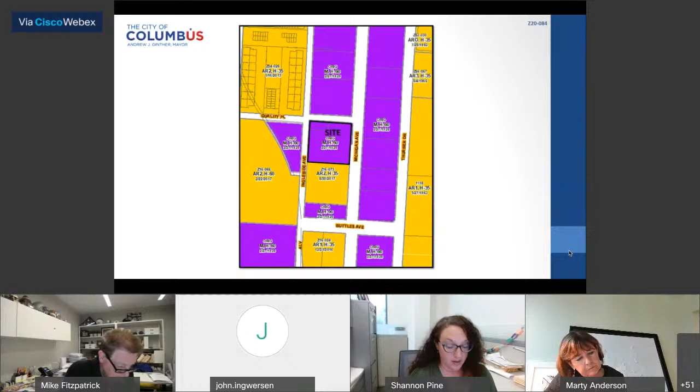To the north across Quality Place is an industrial building in the M Manufacturing District. To the east across Michigan Avenue are a daycare center and office building in the M Manufacturing District. To the south is an apartment complex in the AR2 apartment residential district. To the west across Ingleside Avenue is an industrial building in the M Manufacturing District. Multi-unit residential development in the AR2 apartment residential district is northwest of the site.

The site is located within the boundaries of the Harrison West Plan, which recommends office commercial land uses for this location. The site is also within the boundaries of the Harrison West Society, whose recommendation is for approval.

Concurrent council variance CV 20-097 has been filed to conform the existing telecommunication equipment located in the southwest portion of the site for a monopole on the adjacent property. The request also includes standard variances for increased building height, reduced parking, and reduced parking setback and perimeter yard.

The site plan included with the variance proposes the existing building to be converted to a 27-unit apartment building and the construction of a 28-unit apartment building. The Division of Parking Services has approved a parking study for this proposal and can support the requested parking variance.

The requested AR3 apartment residential district will allow an existing manufacturing facility to be converted into an apartment building and provides for additional apartment development on the site. The proposal is not consistent with the office commercial land use recommendation of the Harrison West Plan. However, given the changing nature of land uses in the immediate area and the age of the plan, apartment residential use is consistent with the mixed-use typology of the area.

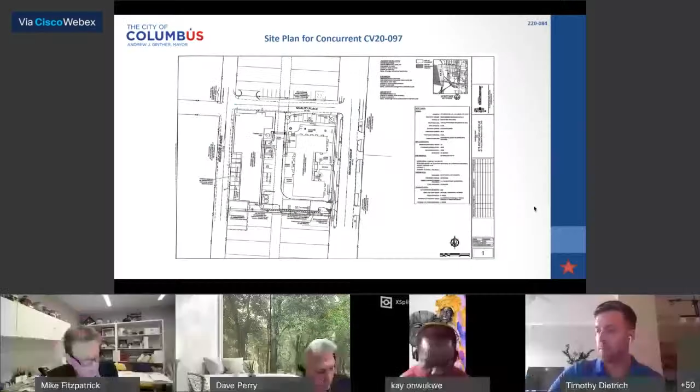Z21-00330 Hawks Avenue. The 0.09 acre site consists of one undeveloped parcel zoned in the CPD Commercial Planned Development District, which permits LP1 private parking district uses. The applicant proposes the R2F residential district to permit residential uses. North of the site across West Broad Street is commercial development in the LC4 Limited Commercial District. South and west of the site across Hawks Avenue are single-unit dwellings in the R2F residential district. East of the site is a parking lot in the LP1 Limited Parking District. The site is located within the boundaries of the West Franklinton Plan, which recommends medium to high-density mixed residential land uses for this location. Additionally, the plan includes early adoption of Columbus citywide planning policies design guidelines. The site is located within the boundaries of the Franklinton Area Commission, whose recommendation is for disapproval. In your supplemental packet, you will see some additional testimony from previous and current property owners of the site, as well as 2 additional letters of support and 2 letters of opposition.

The requested R2F residential district will permit residential land uses. The proposal is consistent with the West Franklinton plan recommendation for medium to high density mixed residential land uses and is consistent with the zoning pattern of the surrounding neighborhood. Planning Division staff supports the request as there are no plans for development of the site at this time. Therefore, City Department's recommendation is for approval, and I'd be happy to help answer any questions.

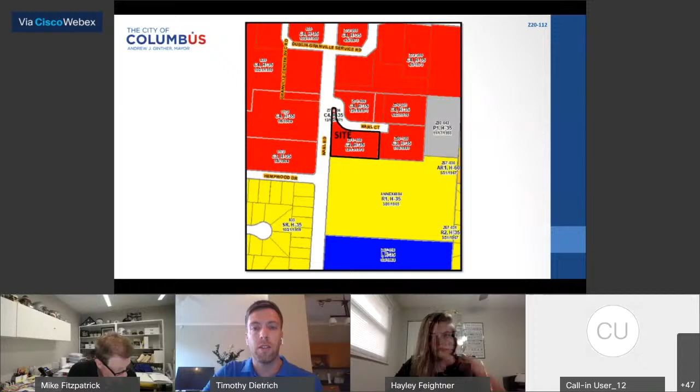North of the site is a religious facility in the C4 commercial district. South of the site is a religious facility in the R1 residential district. East of the site is a commercial building in the C3 commercial district. West of the site is a shopping center in the C4 and C3 commercial districts.

The site is within the planning boundaries of the Northland 1 area plan, which recommends community commercial land uses at this location. The site is within the boundaries of the Northland Community Council, whose recommendation is for approval. The CPD text establishes use restrictions and supplemental development standards addressing building and parking setbacks, traffic access, parking lot landscaping and screening, and dumpster screening. The text includes variances to interior parking lot landscaping, parking lot screening, dumpster screening, screening between commercial and residential districts, and the building setback from Karl Road.

Additionally, the text includes a commitment to maintain the property as shown on the submitted site plan. The requested CPD district will permit C3 uses that allow the existing pharmacy to expand within the existing building on site. The CPD text establishes appropriate use restrictions and development standards that will maintain the property as currently developed. The proposed CPD district is consistent with the Northland 1 area plan's land use recommendation for community commercial land uses at this location and is compatible with the zoning and development pattern along this section of Karl Road. Therefore, staff's recommendation is for approval, and I'd be happy to answer any questions.

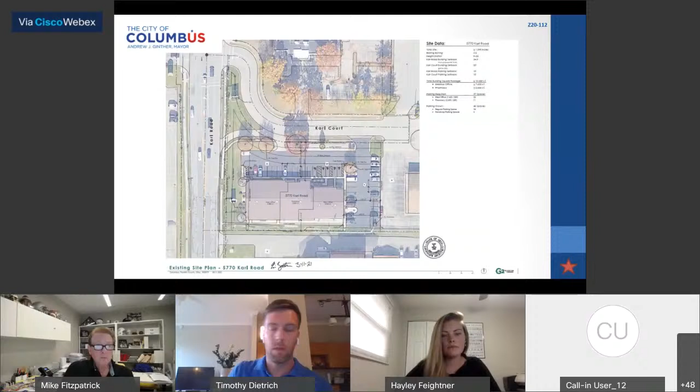Okay, any questions or comments? Dan, any traffic issues here? All traffic issues are resolved.

Okay, David, is there anything you'd like to add to the staff presentation? Nothing I'd like to add. David Hodge, attorney for the applicant, and I'll answer any questions that anybody on the commission or neighbors have.

Okay, are there any questions from the commission? I know Dave Paul is interested in speaking regarding the area commission, so I'll give him a chance to weigh in.

Thank you, Chair Fitzpatrick. Our committee met with Mr. Hodge and the applicants in February of this year, and our committee did recommend approval of this application with two conditions. I don't know if those conditions are satisfied in your packet or not, and perhaps Mr. Hodge will address that. Our committee understood the underlying need for the rezoning, and we supported that.

However, the applicant was requesting to vary from the C3 district they're requesting, in that they wish to not screen a dumpster and wish to avoid screening along the southern property line. Our committee did not support those two variances, so we asked the applicant to remove them. With those conditions satisfied, we are recommending approval.

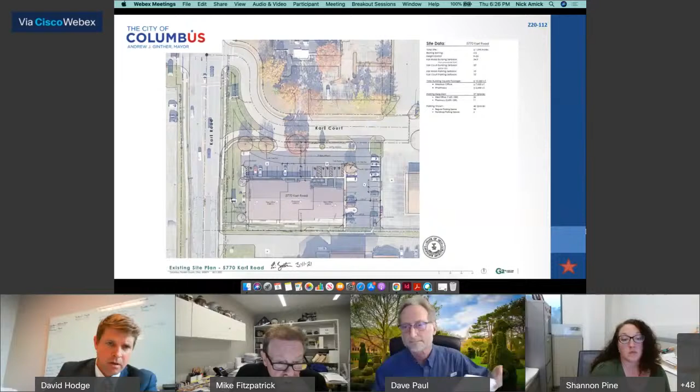Sure. I wonder if we could go back, and I don't know who's driving this, go back and show the site plan so we could refer to that as I address Mr. Paul's remarks. So essentially, what Northland concluded as conditions for their recommendation of approval were two things.

They would like to see the dumpster, which is located here. If you're able to see, in the lower right-hand corner of the property, if you guys can see that.

There's a code requirement that says the southern perimeter of the property needs to be buffered because the church to the south is zoned residentially. But as you can see from the site plan, that's a drive aisle along the southern portion of the property for a church complex that resides there. These are all existing conditions, and from our perspective, the policy purpose behind the screening requirement is to buffer commercial from residential uses, not drive aisles and church uses. So we unfortunately disagree with Northland that the southern perimeter needs to be buffered because it's not residentially used.

The dumpster likewise does not need to be screened. I think it's noteworthy that in your package are two letters of support, one of which I believe is from the church pastor and the property owner here to the south.

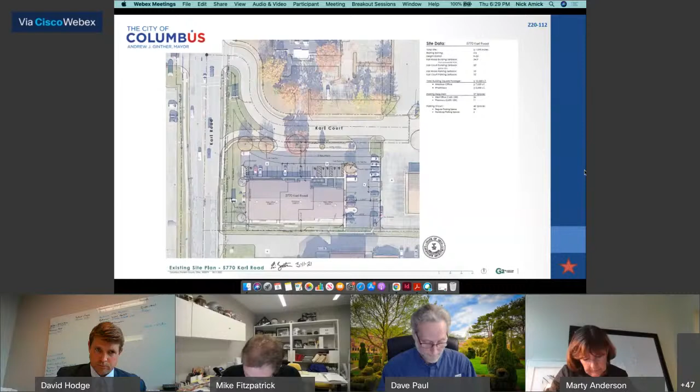Amanda Golden, yes. John Ingwersen, yes. Kay Onwukwe, yes. Marty Anderson, yes. Maria Conroy, yes. And Chair Fitzpatrick, yes. You are approved. Thank you all very much.

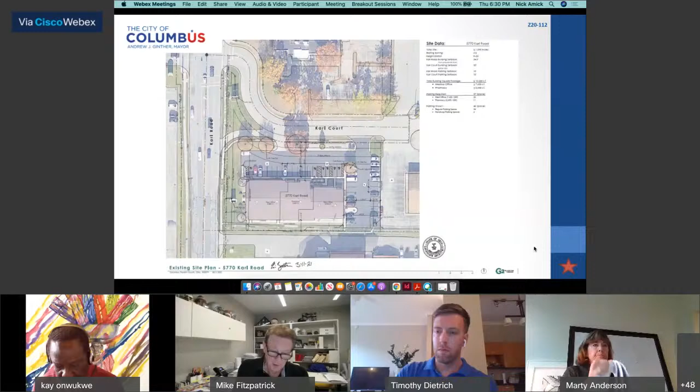Case number 4 was tabled earlier this evening, so we will go to case number 5, which is Z20-017, 5364 Thompson Road. Within your supplemental packet, you will find several letters of opposition from owners within the adjacent subdivision. The site consists of one parcel recently annexed from Blendon Township, developed with a single unit dwelling in the R Rural District. The applicant is requesting the AR1 Apartment Residential District to permit a multi-unit residential development.

To the north and east of the site is a multi-unit residential development in the PUD8 Planned Unit Development District. To the west are single unit dwellings in the PUD8 Planned Unit Development District. To the south, across Thompson Road, is undeveloped land in the PUD8 Planned Unit Development District.

Concurrent CV 21-021, which commits to a site plan and has a maximum number of 88 dwelling units, has been filed to vary the perimeter yard. That request will be heard by City Council and will not be considered at this Development Commission meeting. And I think there's a typo in this—I believe it's CV 20-021.

The site is within the planning area of the Northland Plan Volume 2, which recommends preserve district for this location, calling for a mix of single unit and multi-unit residential uses with some commercial uses. No specific land use guidelines apply to this site. The site is located within the boundaries of the Northland Community Council, whose recommendation is for disapproval. The requested AR1 apartment residential...

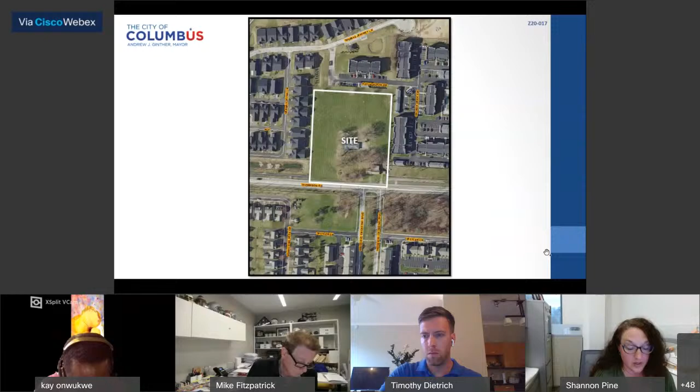Sorry, I'm getting some feedback. I'll try again. The requested AR1 apartment residential district will allow a residential development that is compatible with the density and development standards of adjacent residential developments. The proposal is also consistent with the land use recommendations of the Northland Plan Volume 2. Planning Division staff is supportive of the proposed site plan included with the concurrent council variance, which includes a central green space and provides pedestrian connectivity throughout the development. Therefore, staff's recommendation is for approval, and I would be happy to answer any questions. Thank you.

Any questions or comments from the commission? Okay, Dan, any traffic issues on this site? All traffic issues are resolved. And Kathy, Recreation and Parks?

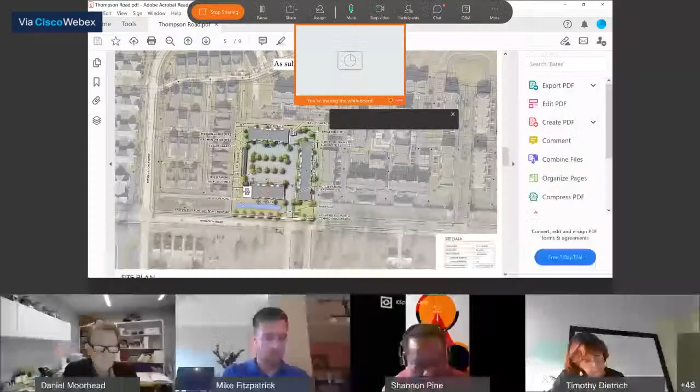I don't hear Kathy, and I can't see her shake her head, so we'll follow up on that. Okay.

There are some speakers, I can just chime in. For parks, there would be a parkland dedication ordinance requirement, and most likely they would be requesting a fee in lieu, and there may be some standard comments during final site compliance review that addresses street trees and whatnot.

All right, on this case we will be hearing from Dave Paul, and there are 3 speakers who are against this proposal. So let's have David. David Hodge, do you want to speak? Yes, please. Okay, please add any comments you have.

Okay great, Shannon, I wonder if someone there can allow me to share my screen. I think you are. Oh, I am already? I see a rendering, I think so. Okay beautiful, okay I didn't know. I tried it and it worked, but I didn't know if it was just me seeing it or if it was everybody.

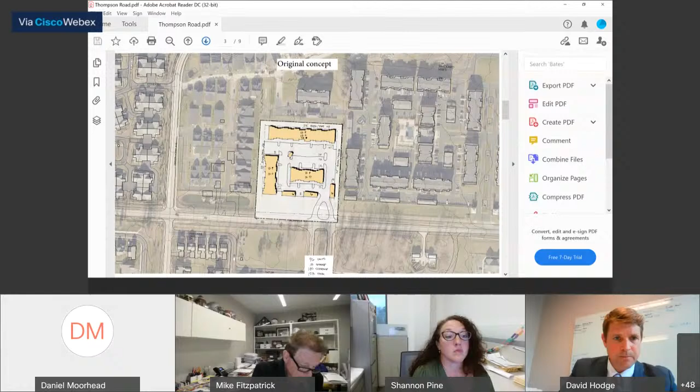Taking the pool and putting it down here along the south with this amenity building, making that be the perimeter as opposed to a building edge, like we had initially. So we've worked to try to soften that edge as best we can.

Certainly, neighbor participation at the Northland Community Council, a couple of meetings we had with them, and I won't put words in their mouth, they can certainly speak for themselves, but we stand by the notion that the density proposed here at just under 23 units an acre, the existing multifamily nature of Thompson Road and the perimeters of this property, our willingness to work with neighbors and with planning to modify the plan, our willingness to commit to that

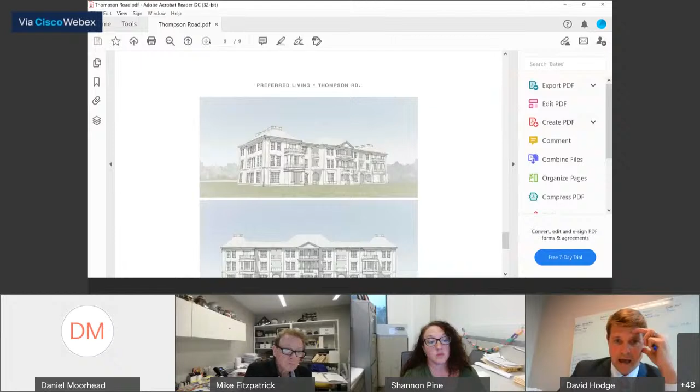plan and to this, what I believe to be really excellent architecture, all tips the scale in balance of a recommendation of approval from the Development Commission on to City Council. I'll stop there.

My client, Jared Smith, is here with me. Jared, I don't know if there are things that you'd like to add before we kick it back to the commission and hear from neighbors. I don't have any other.

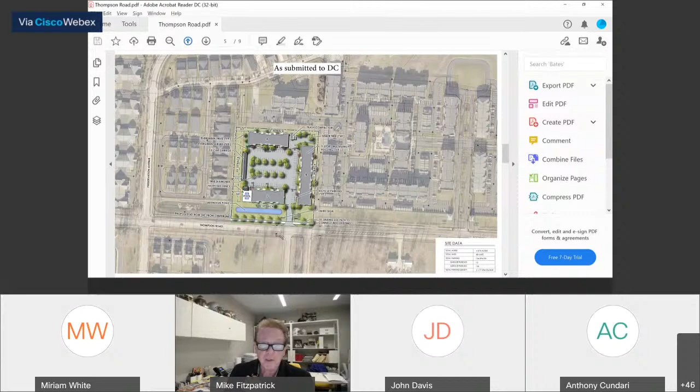Let's bring this back with David. I'd like to keep that aerial photo on the display that's on right now. David, you've heard the issues presented with density and an existing green space that nobody wants to give up. Yes, sir.

So if I might take a minute to address some of the issues I heard from neighbors. You can see the site plan here on your screen. There was general discussion from multiple folks about the development here being too close to the rear of their homes over here at Mayfair.

We attempted to address the issue by redoing the site plan through several different iterations, resulting not in the side of a building being located along that perimeter, but rather the end here, the lower garage structure, and down here, the pool, with significant setbacks all along. Again, the minimum code requirement is 25 feet, and the closest we are is 37 feet with the low, one-story garage structure.

So there was another comment about no green space on the perimeter. It might not be a single-family house on practically 4 acres anymore, certainly, but we are providing green space along the perimeter. And if the Mayfair Bungalows neighbors prefer that we maintain this existing perimeter and put up a vinyl fence, a basket-weave fence, or a board-on-board fence, those are all things Preferred Living is willing to do and commit to here on this plan as an additional buffer.

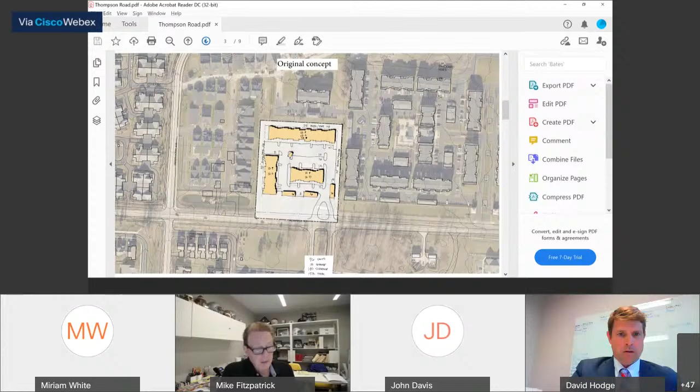Let's go through the commission first. First of all, I'd like to ask, is there any comment or input from the commission members as they look?

Keep that photograph up, right? The actual photograph of existing conditions with the empty lot. There you go. Palmer House, that's 3-story buildings? Yes, sir. The adjacent multifamily is consistent with the height being proposed here.

That's one of the things when you're talking about is a development too dense, then you're talking about parking reductions and height variances and various things. None of those things here. So that adjacent residential is like this, like the proposal before you, 3 stories.

My comments, I'll just keep it simple and straightforward, is the density doesn't bother me. You've moved the buildings back from the west property line. I think in addition to that, you mentioned you would be willing to build a fence. I think that is appropriate, but I also think that the homeowners that are lined up against you on that west property line deserve some evergreens and some deciduous trees for some privacy for their backyards, as well as the 37 and 57 foot or 47 foot space buffer.

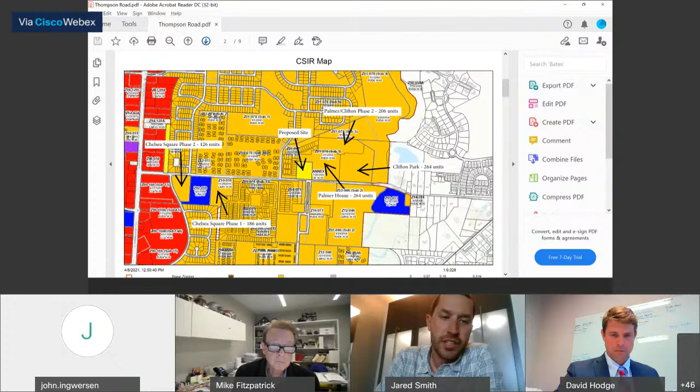Consistent with Palmer, Clifton, and the Mayfair bungalows, it's going to be a mix of brick and mostly vinyl siding. If you look at it, the end of the building is mostly glass on the front. You have kind of towers of brick with some vinyl in the middle. The nice thing about these buildings is the way that they break. Most of them are less than 16 feet, which means in most cases, we're finishing design right now with no vinyl seams, even in themselves. And as vinyl continues to improve, it's harder and harder to tell what's vinyl and what's Hardie.

So Jared, if I might ask you a question—well, actually, never mind. Sorry to interrupt. We'll go on with commission. Does any other commission member besides John have any input or questions?

Yeah, Mr. Chairman, this is Kay. I think when you look at the site plan and then look at the rendering, it looks like what is being proposed is actually in context with the surrounding buildings. I can understand the concern the neighbors are having based on what they've experienced. But the idea the chairman suggested, introducing some evergreen trees, will help create that visual vista for them and provide a physical break from the 3-story building they'll be looking at. So I think the site plan is very attentive to the neighbors.

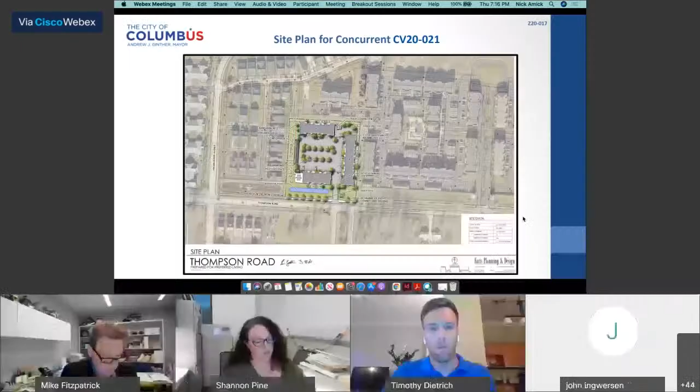Okay, it's 7:15. We can go through one more case at least, and then we'll decide if we're going to take a break or keep pressing on. So let's go to case number 6, Z21-004, 790 North Nelson Road.

The site consists of one parcel developed with a former branch of the Columbus Metropolitan Library in the R4 residential and C4 commercial districts. The requested CPD commercial planned development district will permit the site to be redeveloped as the City of Columbus Police and Fire Joint Wellness Center, to provide mental health and wellness counseling services for the city's first responders.

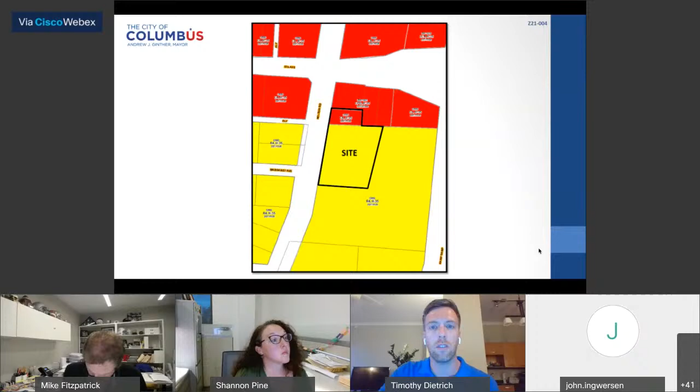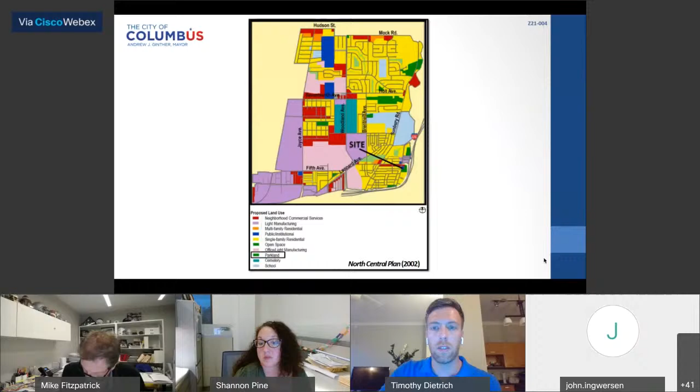North of the site is a gas station in the CPD Commercial Planned Development District. South and east of the site is Shepard Park in the R4 Residential District, and west of the site are single unit dwellings in the R4 Residential District. The site is within the planning boundaries of the North Central Plan, which recommends parkland use at this location. The site is located within the boundaries of the North Central Area Commission, whose recommendation is for approval.

The CPD text establishes use restrictions and supplemental development standards that address building and parking setbacks, traffic access, pedestrian connectivity, parking requirements, parking lot landscaping and screening, and street trees. The text includes variances to parking lot screening, parking lot shade trees, screening between commercial and residential districts, sidewalk connection, and the maximum number of parking spaces permitted. Additionally, the text includes a commitment to develop the site as shown on the submitted site plan.

The requested CPD Commercial Planned Development District will permit C2 uses that include a medical office with counseling services to accommodate the City of Columbus Police and Fire Joint Wellness Center. The CPD text establishes appropriate use restrictions and development standards and includes a commitment to develop the site in accordance with the submitted site plan. While the proposed CPD district is not consistent with the North Central Plan's recommendation for parkland uses at this site, the request will permit the redevelopment of a former branch of the Columbus Metropolitan Library and will not add incompatible land uses to the area. Additionally, the proposed variances are supportable because of the specific type of services provided at this location, resulting in increased security needs. Therefore, City Department's recommendation is for approval, and I'd be happy to answer any questions.

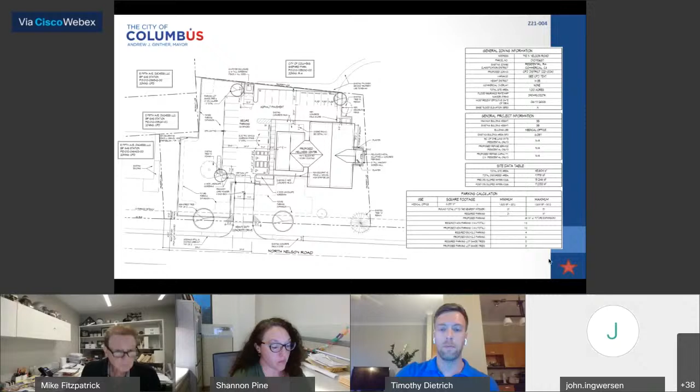Any questions? Dan, traffic issues? All traffic issues are resolved. And recreation and parks, Kathy? No recreation and parks issues.

Does any commission member have any comment or questions for the staff? Okay, the applicant is Mike Jones. Are you here to speak? Yes, sir, I'm here. Is there anything, Mike, you'd like to add to the staff presentation?

Yeah, I think Tim covered everything regarding the project here. But basically, this is a project - it will be a mental health facility, sorry, bear with me, I have a speech impediment so I'll try to speak as clear as I can. This project is one of the mayor's goals this year to improve public safety. Right now, officers' and firefighters' jobs are taxing, and it's very taboo right now for them to speak on their mental health. So our goal here is to create a building, a place dedicated just for them to get counseling, where they feel safe, where it's judgment free and private, and they feel welcome to get help. So that's really it for me.

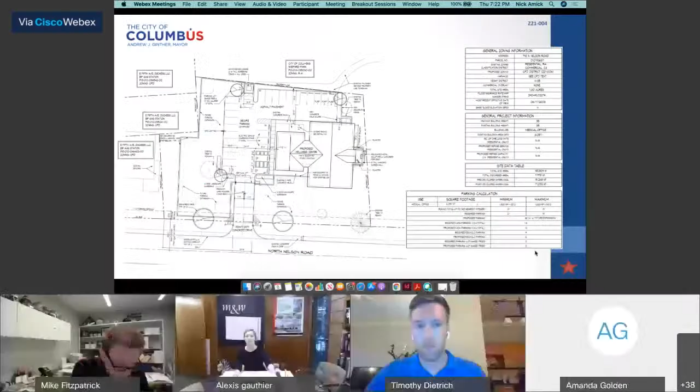Okay, we'll do one more case and then we'll take a poll on whether we take a break or not. Case number 7, Z21-006, 4398 Trabue Road.

The 10.11 acre site consists of one parcel developed with a single unit dwelling in the R1 residential district. The requested LC2 limited commercial district will permit office commercial development. The site is surrounded by industrial development to the north, east, and west in the M2 manufacturing district. To the south across Trabue Road are a single unit subdivision in the R2 residential district and undeveloped land slated for an apartment complex in the L-ARLD limited apartment residential district.

The site is located within the planning area of the Trabue/Roberts area plan, which recommends employment center uses at this location. The site is located within the boundaries of the West Scioto Area Commission, whose recommendation is for approval. I did get an email recommendation shortly after I had already emailed the supplemental packet information, so it was not included in the supplemental packet, but the recommendation is for approval 7-0.

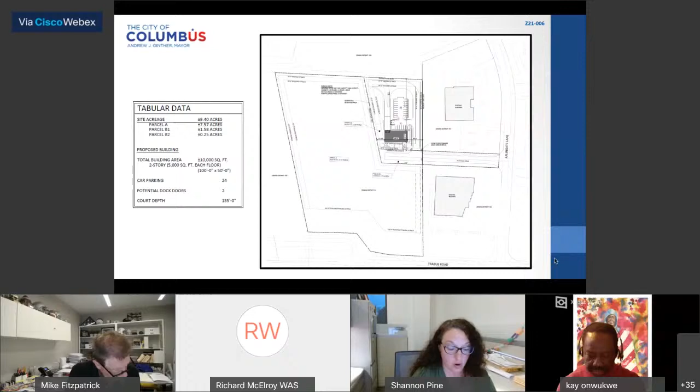The limitation text establishes use restrictions and supplemental development standards that address building and parking setbacks, traffic access, increased landscaping and screening, and lighting controls. The text also includes a commitment to development of the site in accordance with the submitted site plan and building elevations for parcel B1.

The requested LC2 limited commercial district will permit redevelopment of the site with office and related uses. The limitation text includes increased development standards in consideration of the residential uses to the south, and access is restricted via a private driveway from Arlingate Lane. The request is consistent with the employment center land use recommendation of the Trabue/Roberts area plan and is compatible with the surrounding industrial and residential development. Therefore, staff's recommendation is for approval, and I would be happy to answer any questions.

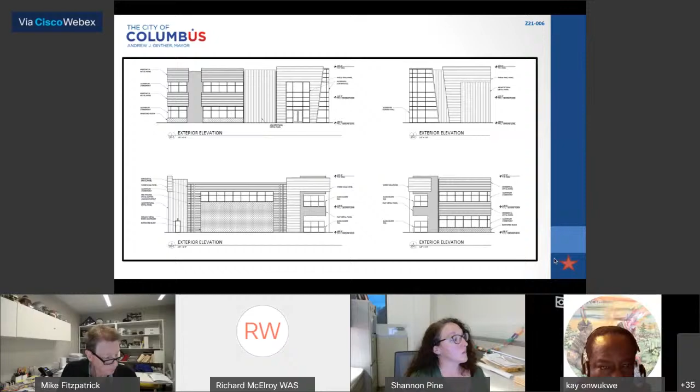Thank you. Okay, Dan, any traffic issues here? All traffic issues are resolved. Okay, and Kathy, Recreation and Parks? There are no recreation parks issues.

Wonderful. Okay, are there any questions from any of the commission members? Okay, Jill Tangeman, do you want to add anything to the staff presentation? I see you have achieved approval from both the area commission and the staff, so. No, I don't have anything further to add. If you have any questions, I'll be happy to answer them. Okay, any questions or comments for Jill?

And there were no speakers signed up for this, so I'm assuming there are no outside speakers. Thus, we are ready to call the roll. Marty Anderson, Yes. Maria Conroy, Yes. Amanda Golden, Yes. John Ingwersen, Yes. Kay Onwukwe, Yes. And Chair Fitzpatrick, Yes. Okay, you are approved.

Thank you. And since we are on a roll right now, we are going past case number 8, which has been tabled. We will go into case number 9, Z19-038, 3553 Refugee Road.

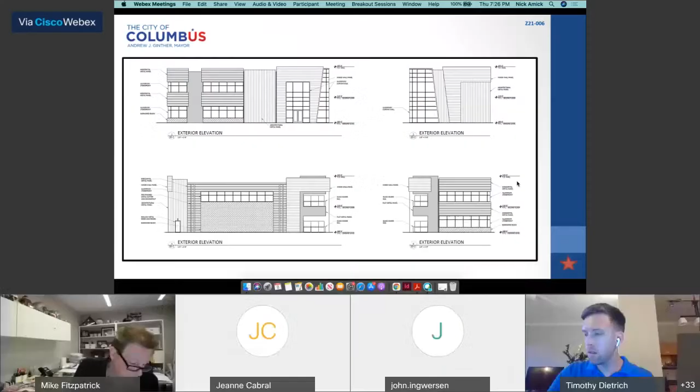The 1.87 acre site consists of a single split zoned parcel being utilized for automobile sales without zoning clearance in the C2 commercial and R rural districts. Order number 19470-1296 has been filed by code enforcement for not being a permitted use, parking or keeping inoperable motor vehicles, and not having a certificate of zoning clearance. The applicant requests the LC4 limited commercial district in order to allow a variety of general commercial uses as well as the automobile sales on the lot.

North across Refugee Road is undeveloped land in the RRR restricted rural residential district. To the east is a small strip shopping plaza and other commercial buildings in the LC4 limited commercial district. To the south is a single-unit subdivision in the R2 residential district. To the west is an automobile sales lot in the LC4 limited commercial district. The site is not located within a planning area, but is subject to the recommendations of Columbus Citywide Planning Policies Design Guidelines. The site is located within the boundaries of the Mid-East Area Commission, whose recommendation is pending their April 20th, 2021 meeting.

The request was previously considered as an unrestricted C4 district by the Mid-East Area Community Collaborative in 2019, with a recommendation of disapproval. A site plan commitment is included in the limitation text, which demonstrates removal of pavement within the required parking setback area with landscaping installed. The requested LC4 limited commercial district will secure proper zoning for an automobile sales lot.

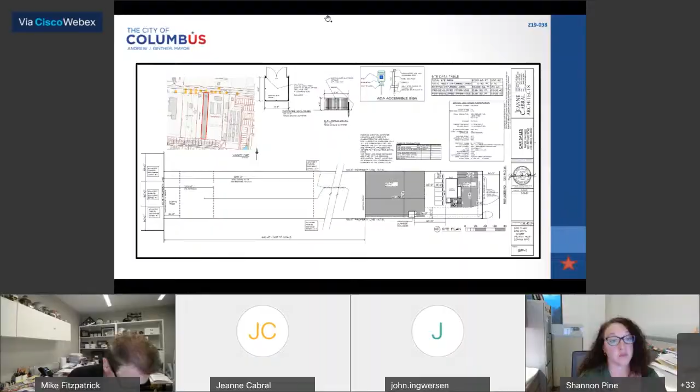So we've been in the process for a little while, which is why we're going to the LC4 to exclude a lot of uses. Everything's cleaned up a great deal, but not everything. There's a big treed area, fairly dense, abutting the residential property, and the fence is falling down. Part of this is installing the fence, repairing it and putting a new one in, whatever we need to do to meet the requirements of the Columbus zoning code. We're still going to apply for a site compliance plan, and anything that needs corrected will be corrected as part of that application process.

Setbacks, landscaping, fencing, all of that, parking spaces. Very good. Daniel, any traffic issues on this narrow piece of property? All traffic issues are resolved. And Kathy, Recreation and Parks? There are no recreation and parks issues.

Does anyone on the commission have any comments? Mike, this is John. Yes, John. Are there any variances being asked for? No, there's not. Okay good. Thank you. Anyone else on the commission have any questions?

I believe, even though this is a really long, narrow lot, if I lived in that house facing stored vehicles and unknown futures, I would certainly appreciate a fence and some evergreens and maybe one deciduous tree to balance things out along that south property line.

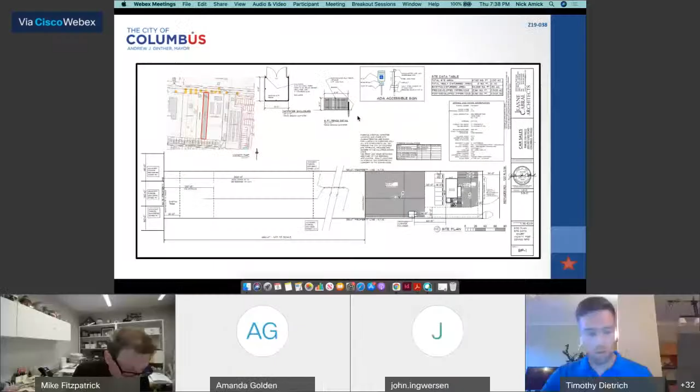It's 7:37. Let's move on with case number 10, Z21-001, 3650 Sunbury Road.

The site consists of one parcel developed with a religious facility and school, split zoned in the R1 residential district and PUD 8 planned unit residential district. The site is subject to ordinance 2082-2018, passed on July 30th, 2018, and is conditioned on the rezoning of the site within 5 years of passage. The requested I institutional district will permit the existing religious facility and school uses.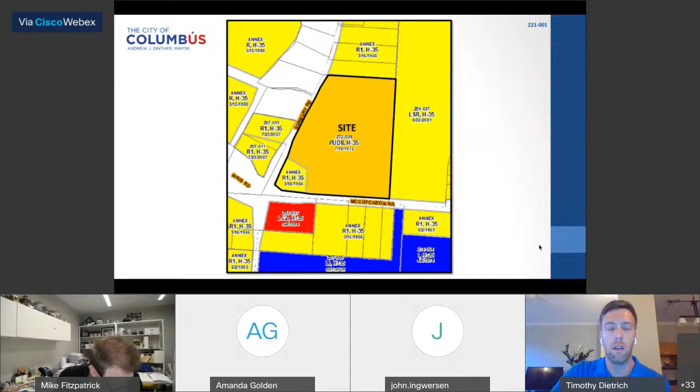North of the site is a single unit dwelling in the R1 residential district. South of the site are single unit dwellings in the R1 residential district and vacant land in the LC2 limited commercial district. East of the site is vacant land in the LSR limited suburban residential district. West of the site are single unit dwellings in the R1 residential district and R rural district in Mifflin Township. The site is within the planning boundaries of the Northeast Area Plan, which recommends institutional land uses at this location.

The site is located within the boundaries of the Northeast Area Commission, whose recommendation had not been received at the time this report is written. It is my understanding that the applicant did get a positive vote from the Northeast Area Commission. I just have not received that form from them yet. So if you have questions for the applicant, I'm sure they'd be happy to answer any.

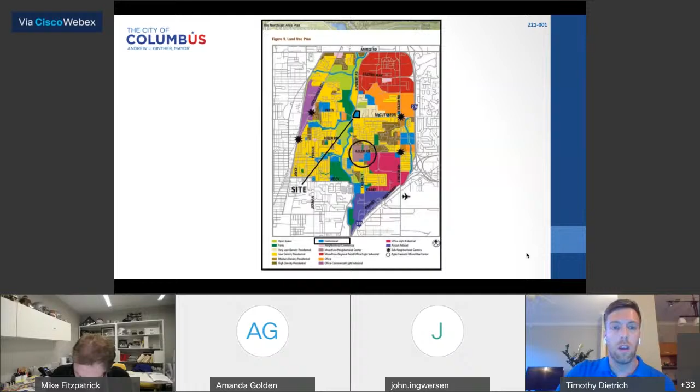The requested I institutional district will permit the existing religious facility and school uses on site. The request meets ordinance 2082-2018's condition for rezoning within 5 years of passage. The proposed I district is consistent with the Northeast Area Plan's land use recommendation for institutional land uses at this location. Additionally, the proposed zoning district will not add incompatible uses to the area. Therefore, the city department's recommendation is for approval, and I'd be happy to answer any questions.

Okay, any questions for Tim? Dan, traffic issues? We don't have any issues with this application. Okay, and Kathy, how about Recreation and Parks? We have no concerns with this application.

Okay, case number 10 does not show any speakers. The applicant, is the applicant here? Yes, I'm here. This is Delane Cox. Okay, Delane, is there anything you want to add to the staff's presentation? Thank you. I would just say that, yes, we did attend the Northeast Area Commission session last week and did receive approval. And they said that they would forward that through the mail.

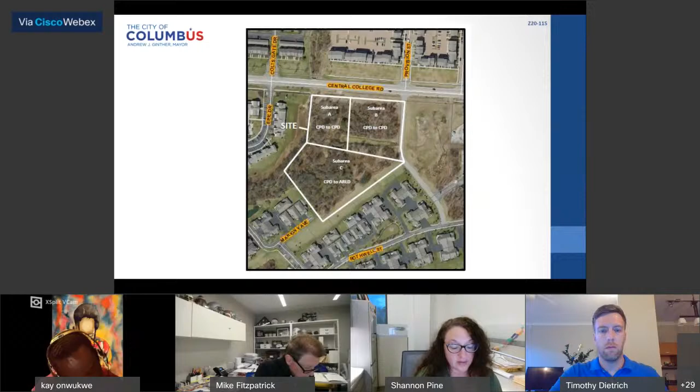The site is located within the boundaries of the Rocky Fork Blacklick Accord panel, whose recommendation is for approval. That panel recommends the applicant work with the Recreation and Parks Department to further explore the development of a creek trail within the vicinity of the stream corridor protection zone with connectivity to the site, and to incorporate additional bicycle parking, specifically in subarea B and C, noting these are encouraged but not conditions of approval.

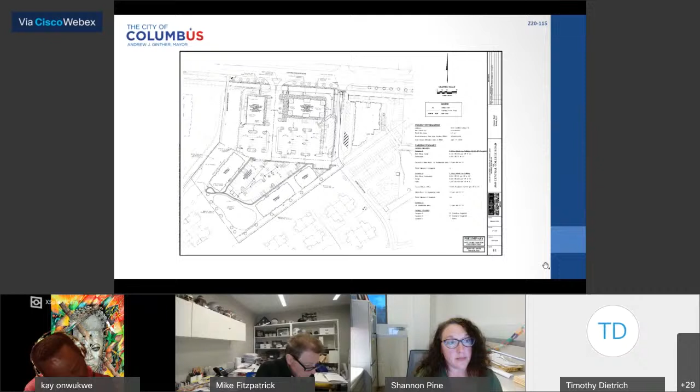The proposed uses and density are appropriate based on the location and surrounding developments along Central College Road. Additionally, the applicant is proposing office components, which is in line with the Rocky Fork Blacklick Accord recommended use for the site. The revised site plan and building design are consistent with the recommendations from the plan.

While Planning Division is supportive of the proposal, the applicant is encouraged to further consider the development of a trail with connectivity to the site, to incorporate additional bicycle parking, specifically within subareas B and C. The request also accommodates an ARLD district for apartment residential development.

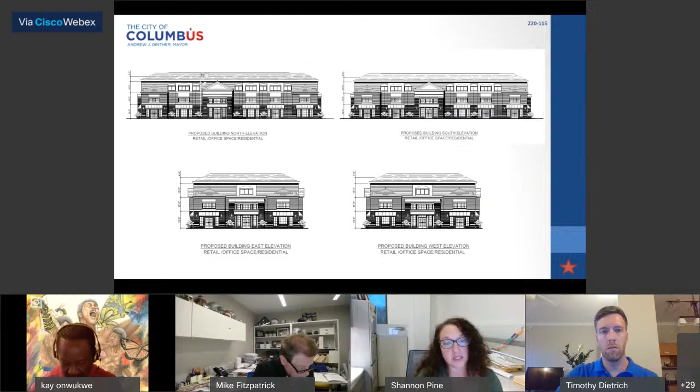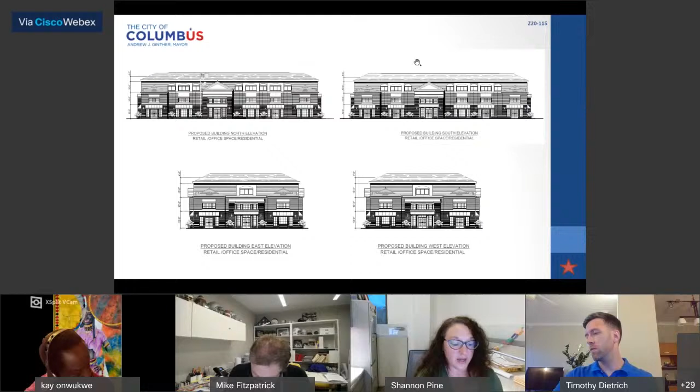At the time this report was written, there was still outstanding traffic management comments. I think those are resolved. There's also an email from Daniel Moorhead in the supplemental packet, but I'll let Daniel speak to that. The staff report recommendation will be updated to approval upon resolution of all the remaining Division of Traffic Management issues. With that, I'd be happy to answer any questions. Thank you.

Okay, let's find out some facts from Daniel. Like Shannon mentioned, with the revised site plan, our traffic issues are resolved.

They're all set, okay. And Kathy, stream corridor, some interesting things in your world, what say you? Yeah, we've had some conversations, and we're willing to work with the applicant to look at some trail connectivity. It's more about some of the details that we need to work out, but we can continue to work on that between now and City Council meetings. Okay.

Does anyone on the commission have any questions or comments for the staff? Okay, the applicant is here.

Aaron Underhill, would you like to add anything to what the staff has said so far? Hello, Chair Fitzpatrick. My name is Eric Zartman. I'm an attorney at Aaron Underhill, Underhill and Hodges law firm. I'll be representing the applicant on this case. The applicant, Ethan Sage, is here. He's the principal at Grenaz Development, should you have any questions for him later in the presentation.

All right, thank you for the intro. I don't have too much to add, other than regarding the additional bicycle parking. That is something we believe is appropriate, and we'll work to include that on the site plan.

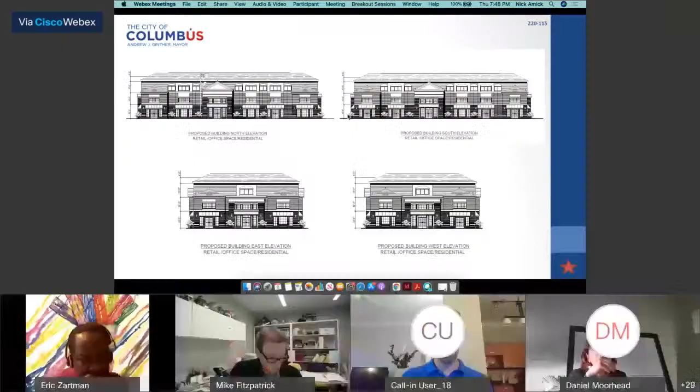And then at the encouragement of the Rocky Fork Blacklick Accord, we reached out to Kathy regarding what kind of options would be available for a trail on the western perimeter. Right now, if you can see our site plan, the proposed buildings are right up against the stream corridor protection zone, so we asked what kind of options there might be for doing a trail along the edge of the stream corridor protection zone.

As Kathy said, that is something the applicant is interested in doing, should that be permitted. Kathy initially said it might be discouraged, but as she said, we'll continue working with her to see if there's anything we can do to try to get that connectivity from subarea A to subarea C. I don't have anything else to add, but I'd be happy to answer any questions you may have.

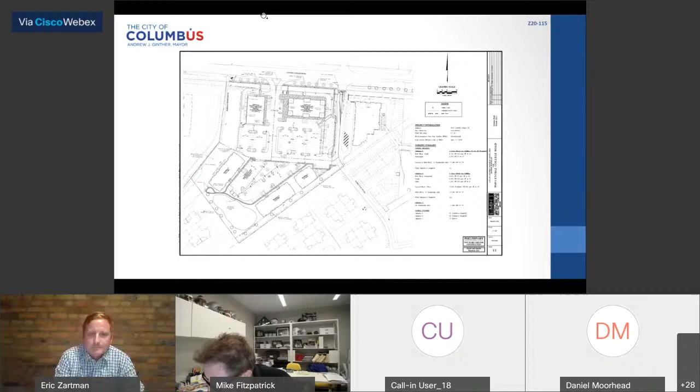Thank you. All right, let's go. I think there's a speaker, Mr. McElroy, is he in? Yes, I'm here. Would you like to speak, sir?

Yes, I appreciate the time. I'm speaking on behalf of our condominium association. We're 123 units, clubhouse and pool area. And I've polled the people most affected by this. It's the residents that are along the Marnie, which is on the west end of their property, and the Rothwell people on the south end.

This development is in conjunction with the property that they're developing just to the east, which is the Bubbly Way Street that has been renamed, and it's the Bubbly Hall. And a major concern, I guess, for us is property values and setbacks and buffering.

The one thing about when I read the application, the buffering and the landscaping, the south easement, I guess it's a subsection 8C is what we're most concerned about, which confronts on our property. This area comes up and the actual boundary comes to the gas easement. They've indicated a 25-foot setback from the easement.

And I guess our concern is the site plan indicates two apartment buildings of 2 stories, I believe, in talking with Ethan on that property. We're concerned that those are right up on the edge of that property line. And again, we're looking for a little more buffering, or hoping there'll be some more, and as others have mentioned, fencing, landscaping, and something to keep our area a little more private. With these 2 developments, we're starting to see increased traffic and those kinds of things in the area.

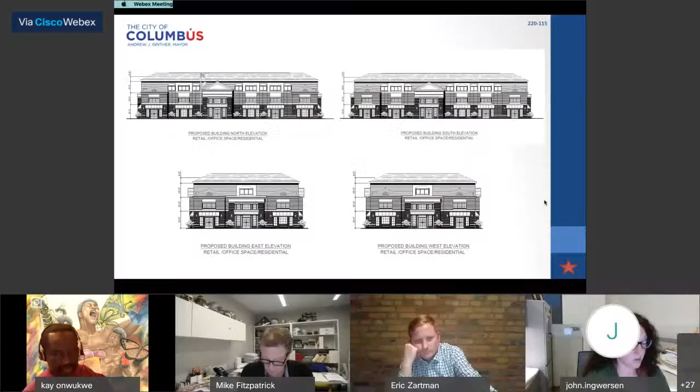Go to case number 12, Z21-009, 590 Reynolds Avenue. Within the supplemental packet is a copy of today's email from the Planning Division, which has received elevation drawings that comply with the C2P2 design guidelines. Can you hear me okay?

Yes, thank you. The 0.15 acre site is undeveloped in the P1 private parking district. The requested R4 residential district would allow a single unit dwelling development. The applicant is contemplating a future lot split that would permit the construction of 2 single unit dwellings. To the northeast and west of the site are single unit dwellings in the R4 residential district. To the south across Reynolds Avenue is a manufacturing facility in the M manufacturing district.

The site is within the planning boundaries of the Milo Grogan neighborhood plan, which recommends single family residential land uses at this location. Additionally, the plan includes early adoption of the Columbus Citywide Planning Policies Design Guidelines. The site is located within the boundaries of the Milo Grogan Area Commission, whose recommendation is for approval. The city department's recommendation has been updated from conditional approval to approval because the building elevations were satisfactory to the planning division. The requested R4 residential district will allow a single unit dwelling development that is compatible with adjacent residential developments. The proposal is also consistent with the land use recommendations of the Milo Grogan neighborhood plan.

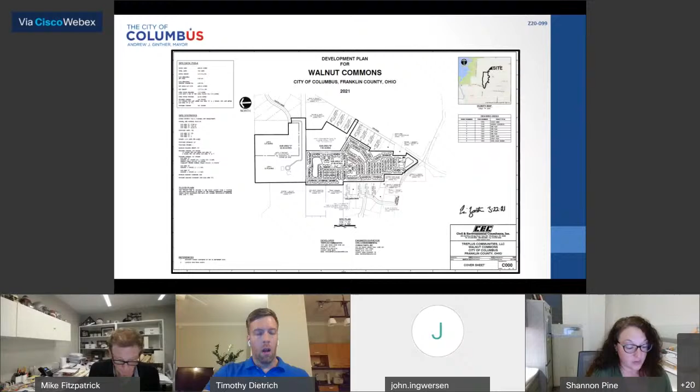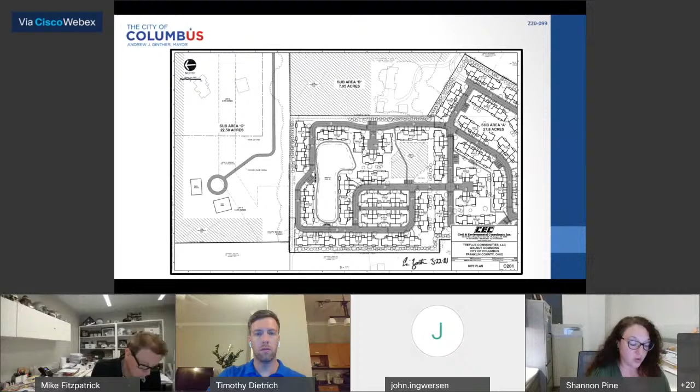Staff support for this development proposal is predicated upon consistency with C2P2 guidelines, including clear delineation of preservation of natural feature areas, including the tree canopy, wetland, and site elements marking their preservation to prevent encroachment from future development, site design that avoids housing units backing up to open space, and integration of open space as an organizational element throughout the development, including sidewalks on both sides of the street network connected to internal paths, activating open space areas as appropriate.

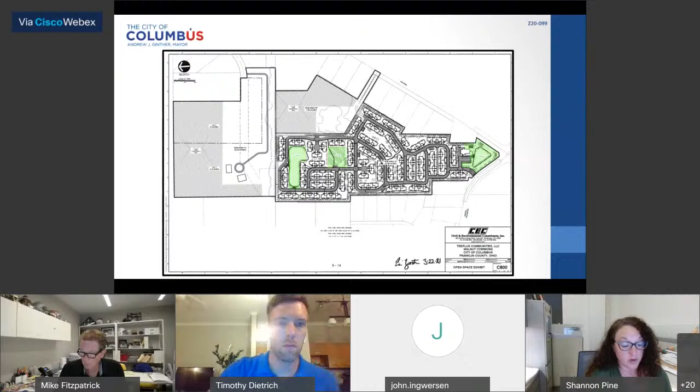This site is not located within the boundaries of a civic association and falls outside of the Rocky Fork Blacklick Accord implementation area. The PUD text commits to a site plan and proposes AR12 Apartment Residential District Standards, Subarea A, including development standards addressing maximum number of units, access, private streets, sidewalks, connectivity, open space, landscaping and screening, and building elevations. The text also proposes R1 residential district standards and tree preservation areas in subareas B and C, and connectivity between subareas A and B.

A traffic access study is still pending review by the Division of Traffic Management and Franklin County Engineers Office, and additional traffic-related commitments will likely be required. Previous conditions regarding sidewalks and connectivity are now met, and the required right-of-way dedication of 40 feet from center line of Central College Road is reflected on the site plan.

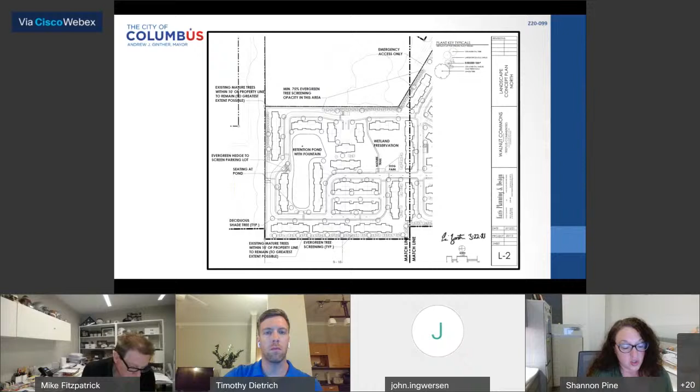The requested PUD4 planned unit development district will allow a multi-unit residential development containing 156 units and 3.35 acres of open space on subarea A, while retaining 2 single-unit dwellings and permitting a 3rd single-unit dwelling on subareas B and C. Planning Division staff supports the proposal with the addition of a declaration of notice of zoning requirements recorded with Franklin County over the tree preservation areas, which protect 16.1 acres in subareas B and C. Said tree preservation area was factored into the density calculation for the primary build-out site, resulting in a density of approximately 3.5 units per acre, which is supported.

Planning Division staff appreciates the inclusion of alley-loaded style units in subarea A and sidewalks on both sides of the street. Once the traffic access study is approved and necessary commitments have been added to the PUD text to the satisfaction of the Division of Traffic Management, the staff recommendation will be updated to approval. Therefore, staff's recommendation is conditional approval at this time. I'd be happy to answer any questions. Thank you.

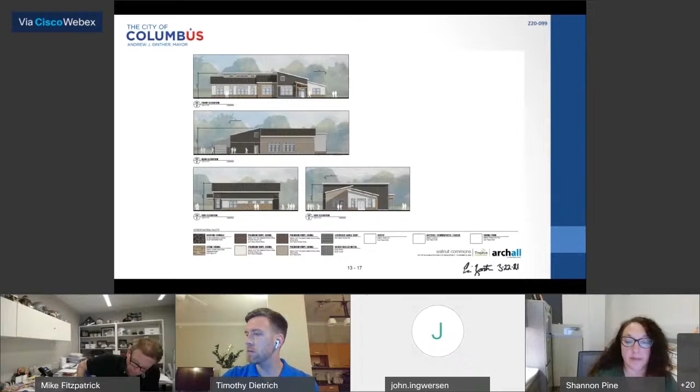Commissioners, any questions? Marty, have you got any issues regarding conditional approval?

Yeah, it's no different than my other comments. I apologize to my fellow commissioners, but I'm really not sure there is such a thing as conditional approval. It sounds like a lot of progress has been made. I just believe, it's not a preference, I don't think there is any such thing as conditional approval. I respect my colleagues, especially my long-serving colleagues' opinions to the contrary. I would vote no just because of that, but I just want to let my colleagues know it is predominantly because of that.

Any else? John, can we hear from Dan Moorhead? Well, absolutely. I just wondered if you had any questions for Shannon, but we'll go to traffic next. Daniel?

Like Shannon mentioned, not all traffic management issues have been resolved for this application. The Central College Road frontage of this site is under the jurisdiction of the Franklin County Engineers Office, and they have full access approval authority for the proposed access point to Central College Road and for the traffic access study that is in progress. Although we typically ask that any commitments Franklin County asks for be incorporated into zoning text, and that's the reason for the conditional approval as opposed to full approval.